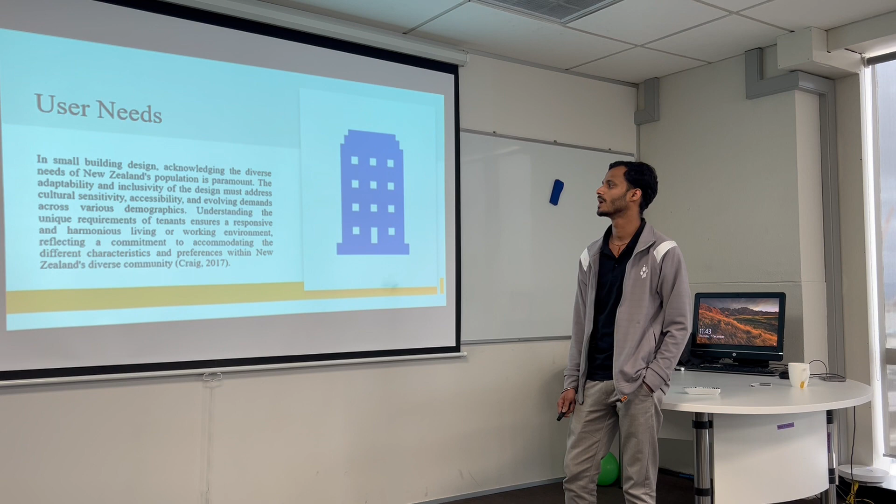Third, user needs. In small building design, acknowledging the diverse needs of the New Zealand population is paramount. The adaptability and inclusivity of design must address cultural sensitivity, accessibility, and evolving demands across various demographics. Understanding the unique requirements of tenants ensures a responsive and harmonious living or working environment, reflecting a commitment to accommodating the different characteristics and preferences within New Zealand's diverse community.

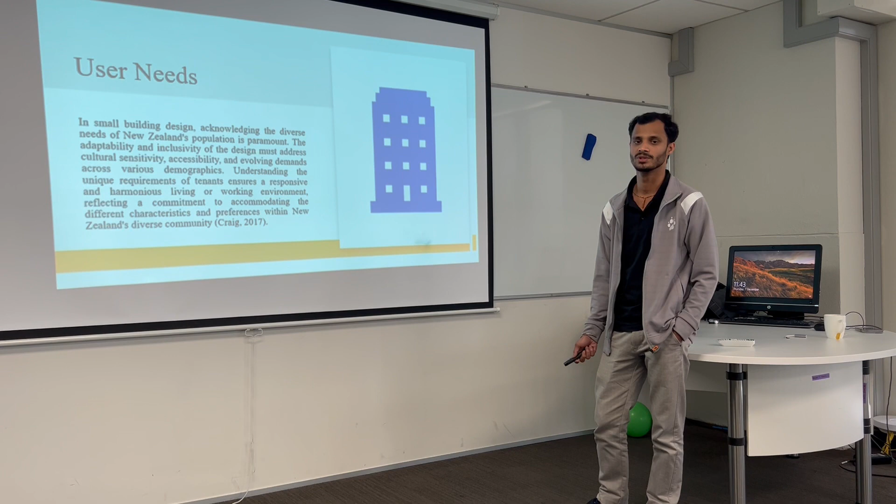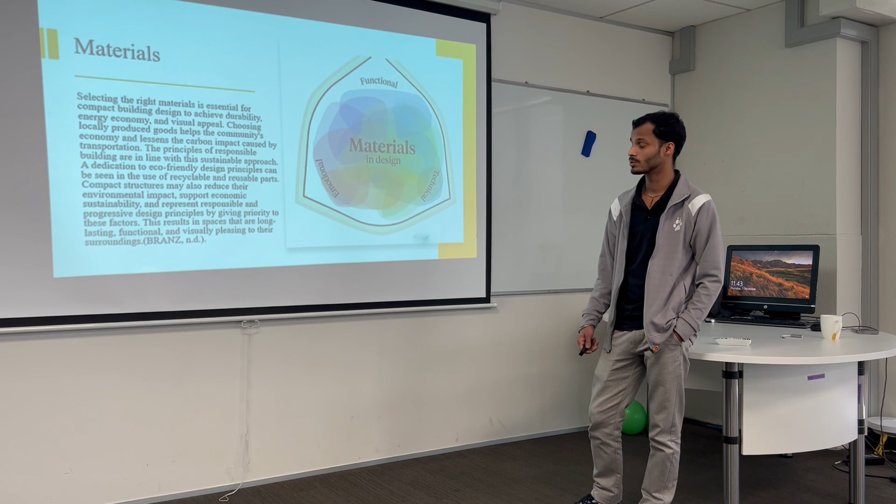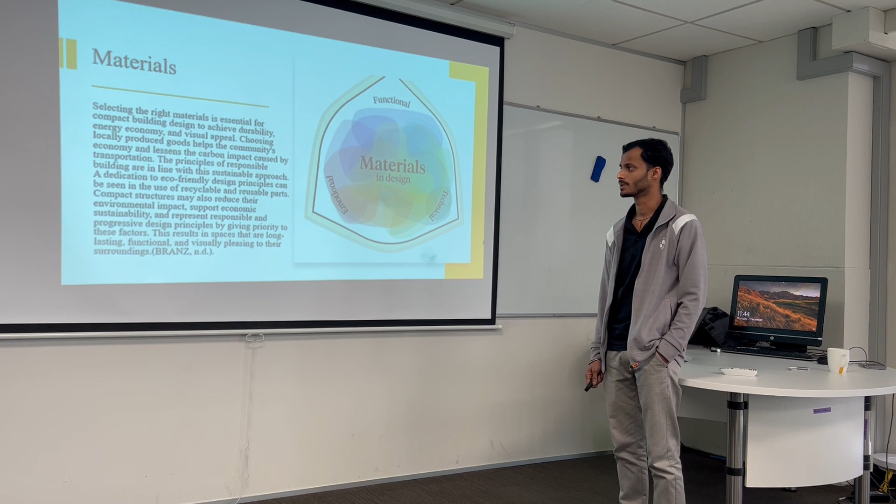Material. Selecting the right materials is essential for compact building design to achieve durability, energy economy, and visual appeal. Choosing locally produced materials would help the local economy and lessen the carbon impact caused by transportation. The principles of responsible building align with this sustainable approach.

Our dedication to eco-friendly design principles can be seen in the use of recyclable and reusable parts. Compact structures may also reduce their environmental impact, support economic sustainability, and represent responsible and progressive design principles by prioritizing this factor. This results in spaces that are long-lasting, functional, and visually pleasing to their surroundings.

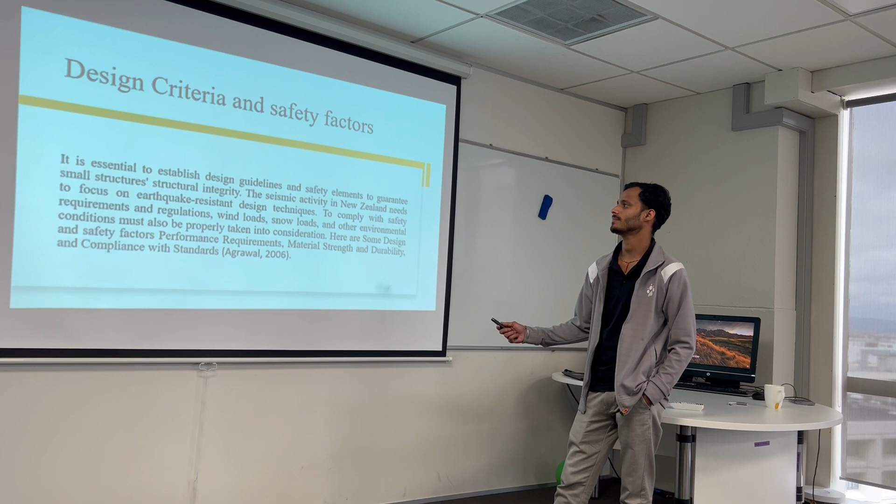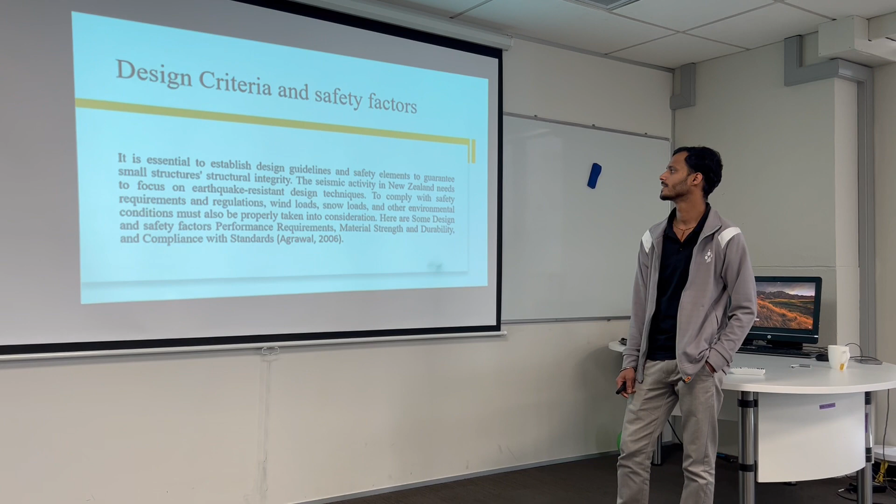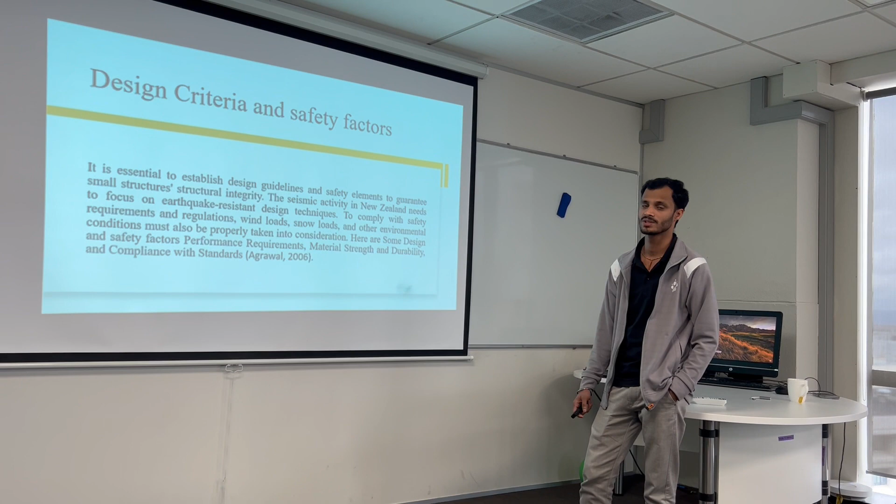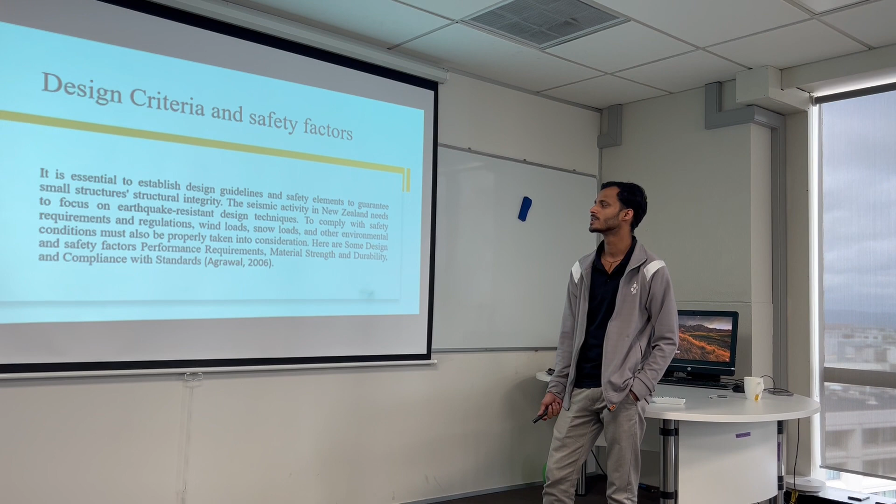Next slide: design criteria and safety factors. It is essential to establish design guidelines and safety elements to guarantee structural integrity of small buildings. Seismic activity in New Zealand requires focus on earthquake resistant design techniques to comply with safety requirements and regulations. Wind load, snow load, and other environmental conditions must also be properly taken into consideration.

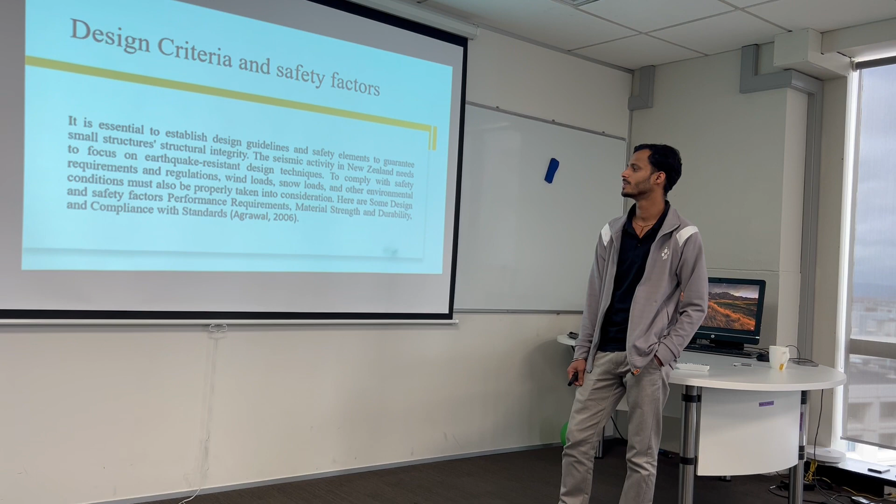Here are some design and safety factors: performance requirements, material strength and durability, and compliance with the standards.

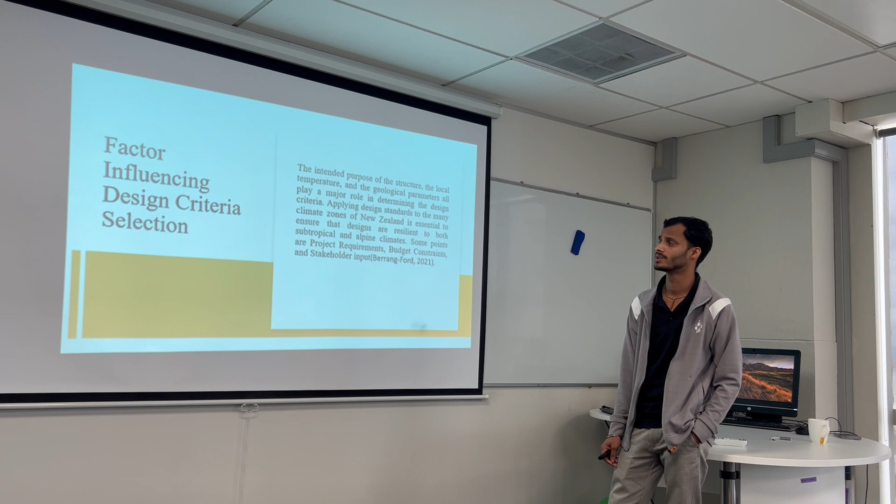Factors influencing design criteria selection include the intended purpose of the structure, local temperature, and geological parameters, which all play a major role in determining the design criteria. Applying design standards to the many climate zones of New Zealand is essential to ensure designs are resilient to both subtropical and alpine climates.

Other points include project requirements, budget constraints, and stakeholder input.

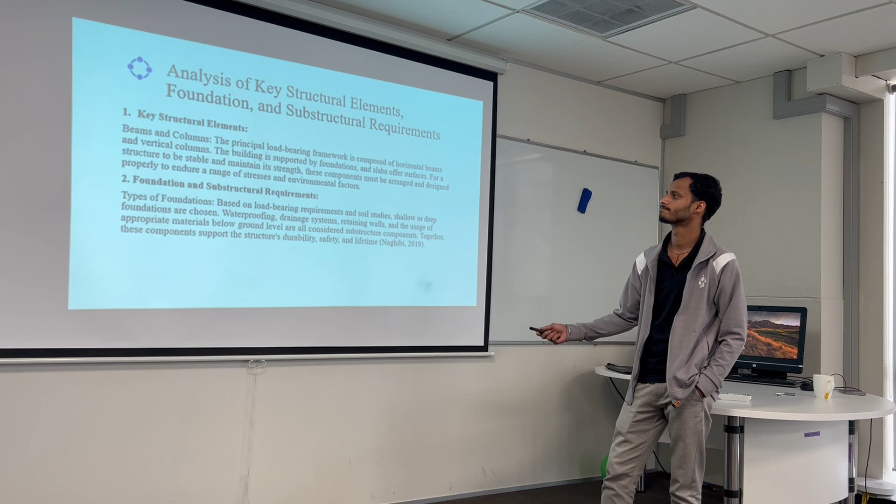Next, we analyze key structural elements, foundation, and substructural requirements. First, key structural elements, and second, foundation and substructural requirements.

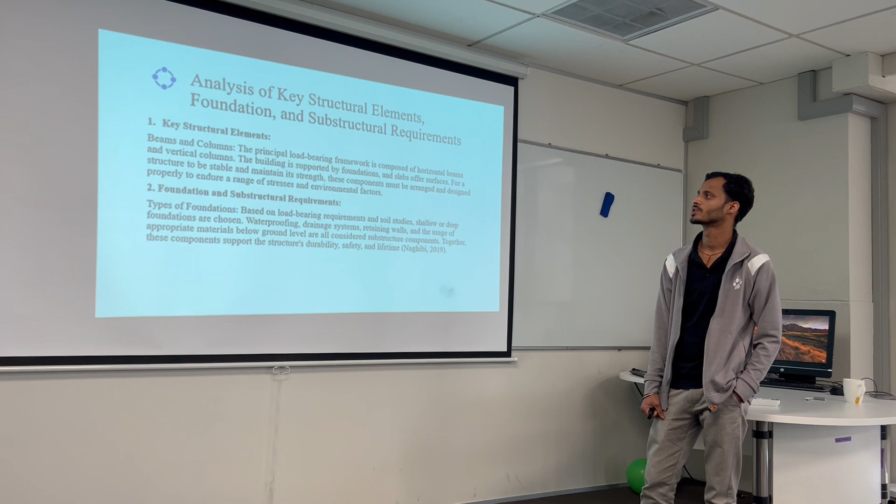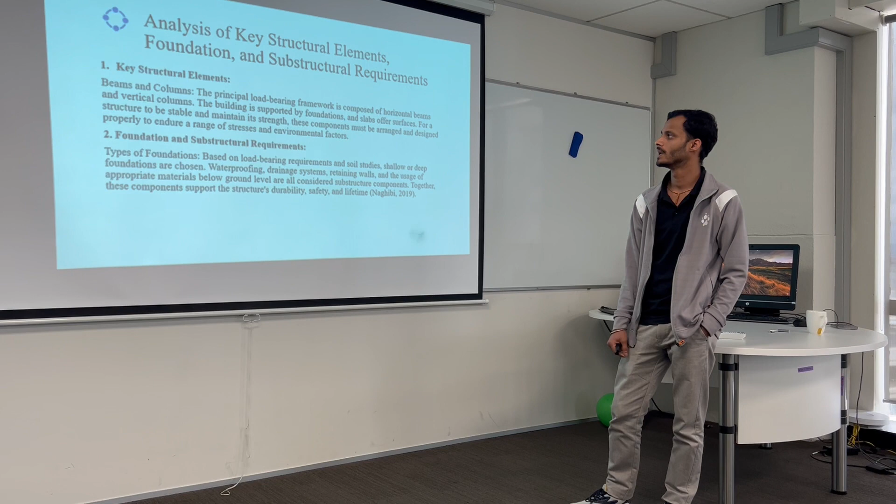Beams and columns form the principal load-bearing framework, composed of horizontal beams and vertical columns. The building is supported by the foundation and slabs offer surfaces. For a structure to be stable and maintain its strength, these components must be arranged and designed properly to endure a range of stress and environmental factors.

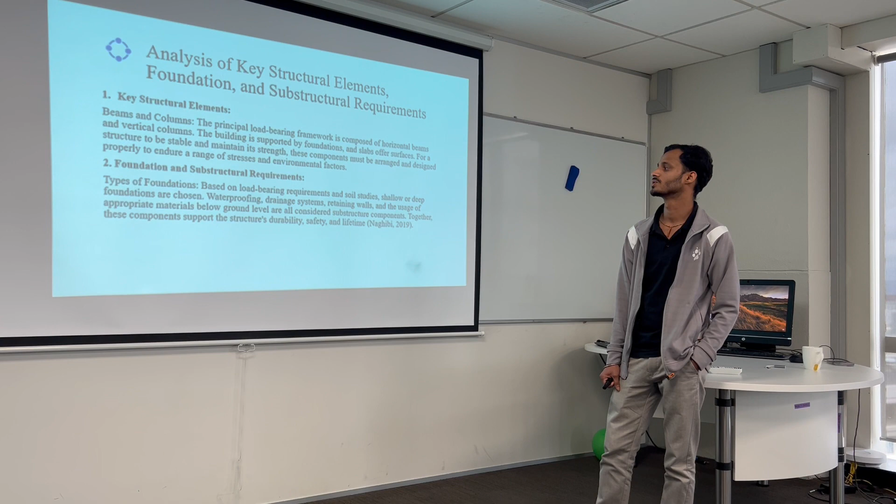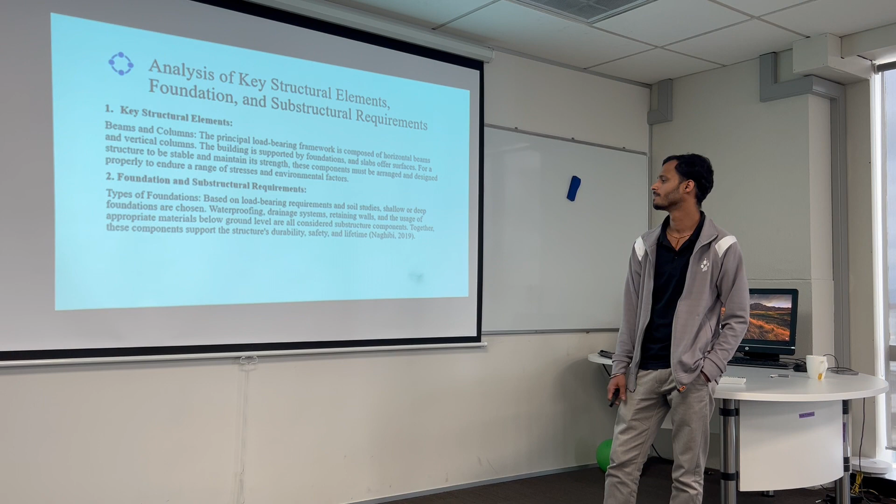Foundation and substructure requirements depend on the type of foundation based on load bearing requirements and soil studies. Shallow or deep foundations are chosen accordingly. Waterproofing, drainage systems, retaining walls, and the use of appropriate materials below ground level are also considered substructure components. Together, these components support the structure's durability, safety, and lifetime.

In conclusion, small building design in New Zealand is a varied process that requires a total approach, considering functionality, sustainability, user needs, materials, time, and cost implementation. Such buildings can not only avoid environmental difficulties but also contribute to a resilient and sustainable built environment in New Zealand by putting safety first and applying creative design solutions.